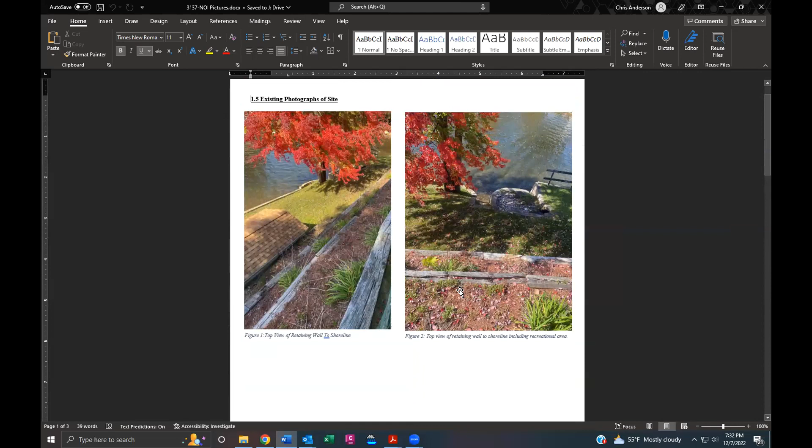Can everybody see my screen? Yep. Again, for the record, Chris Anderson with Hannigan Engineering, here to represent Paul Cadaret for the replacement of an existing timber wall located at 42 Pearl Street. This property currently contains an existing house, driveway, the whole nine yards, with an old timber retaining wall system facing towards Lake Shirley. This retaining wall holds back approximately 20 feet of land up towards the house. At this point in time, the retaining wall is in a state of deterioration and coming towards the end of its useful life. So it's the intent of the applicant to replace that retaining wall system in place with a masonry block wall system to ensure its long-term longevity. I do have a few pictures showing the current state of the retaining wall, taken from the top of the wall looking down. You can see the old timbers starting to decay away a little bit. I also have some side shots and another top shot showing the retaining wall in its current state. So as you can see, it's pretty deteriorated and coming to the end of its life.

So, Chris, do I understand it correctly that this retaining wall is not lakeside? It's farther away from the lake?

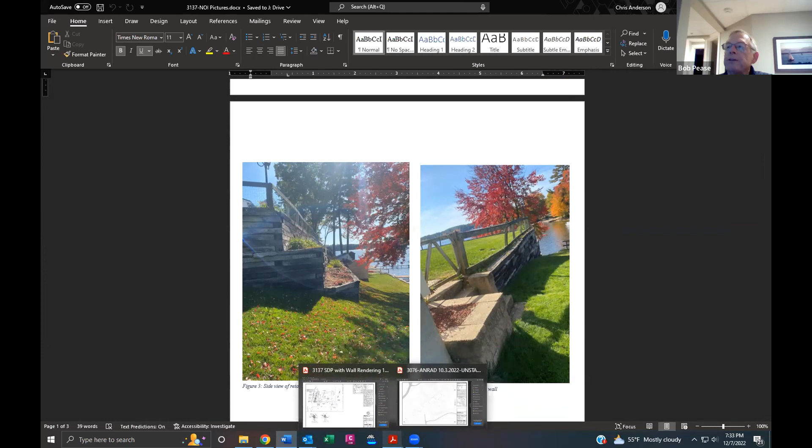It is lakeside and does face the lake, but this is all located outside of the actual lake itself.

The only retaining walls we're proposing to replace are located in this general area. There are three existing 4-foot tall timber walls, and the intent is to replace those in kind at the same elevation upon completion of construction. There would be a fall protection fence along the top edge to replace the existing guard post and rail fence that's there now. We'll encompass the entire area with straw wattle and silt fence along the lake shore line for sediment migration.

It was originally intended to utilize a portion of Lake Shirley during lake drawdown for access. We don't believe it's necessary at this point, but we'd like the commission's input on whether that would be acceptable. Access would be exclusively during the drawdown, and we would walk the line with the commission and the administrator prior to anything happening to make sure we're all in agreement.

Before the lake rose again, all structures and mitigation measures would be taken out of the lake to make sure that by the time the water was brought back up to the original intended elevation, it would be all set and done.

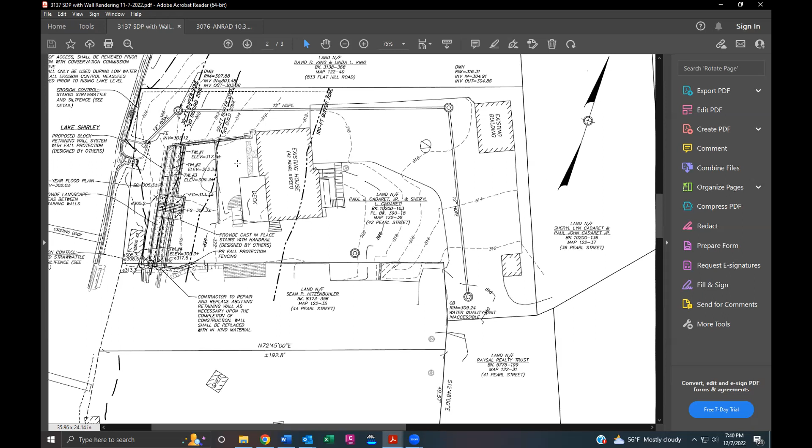This is an NOI. I'm hoping someone will make a motion to approve this NOI with the caveat that Richard mentioned about access through the property, and if they want to access it through the lake, they have to come back for a field change.

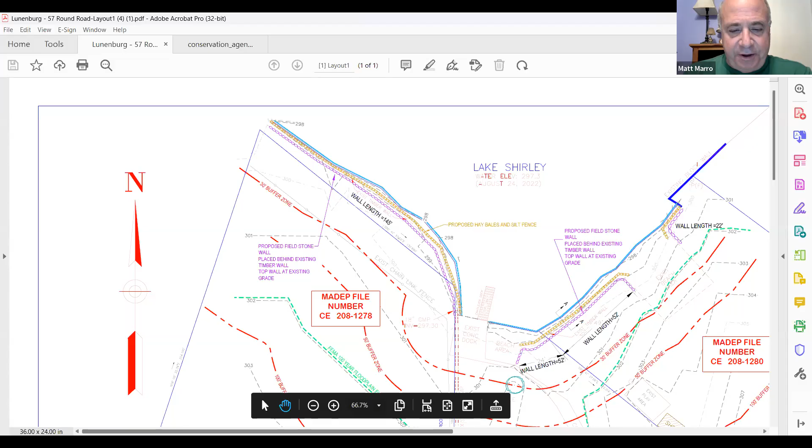I'm trying to get our new administrator a second screen and a license to Adobe Acrobat. Oh, that would be very useful. I have a license myself and it comes in very handy. Well, the town should be furnishing that to our administrator, in my humble opinion. Preaching to the choir on that one, Mr. Chair.

So just to review for the members, we have retaining walls that were historically present that are being replaced. I know the commission has walked the site and we went over some photos. At that point we were waiting for the DEP number and comments. Regarding the DEP comment on the floodplain, I went back to Mr. Oldfield and he was able to get a revised plan, which this is, sent to the office.

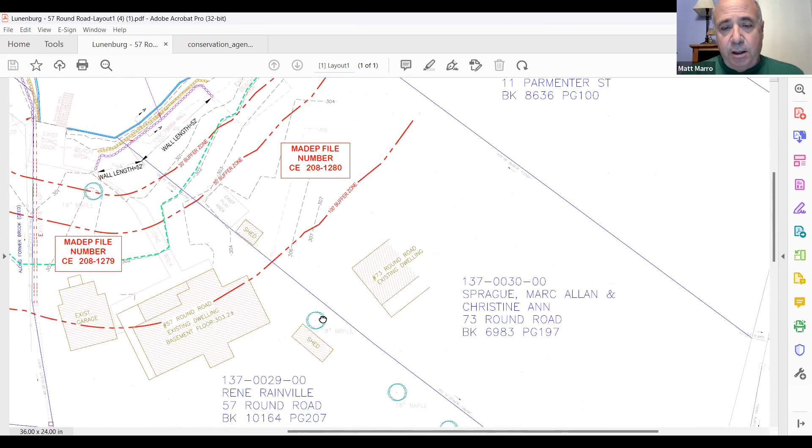I was able to email it to Rebecca last week, last Wednesday. So essentially, Mr. Oldfield has clarified these plans and included a revision note in here, which I don't know if you can see, but it's dated November 30th, and basically states that all the—let me shrink this down so I can get there better.

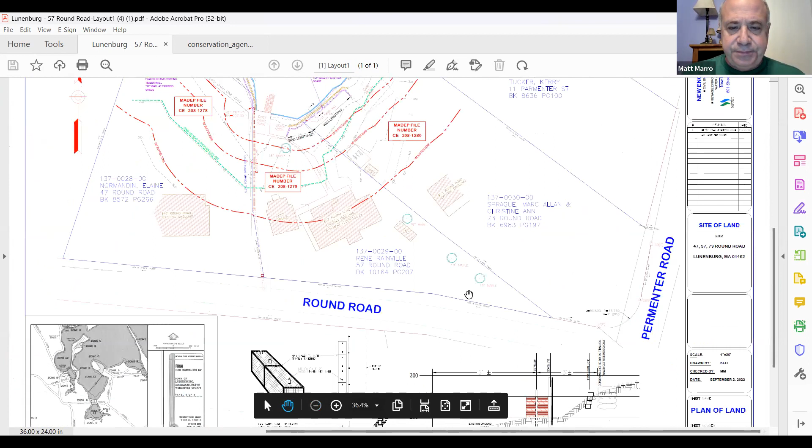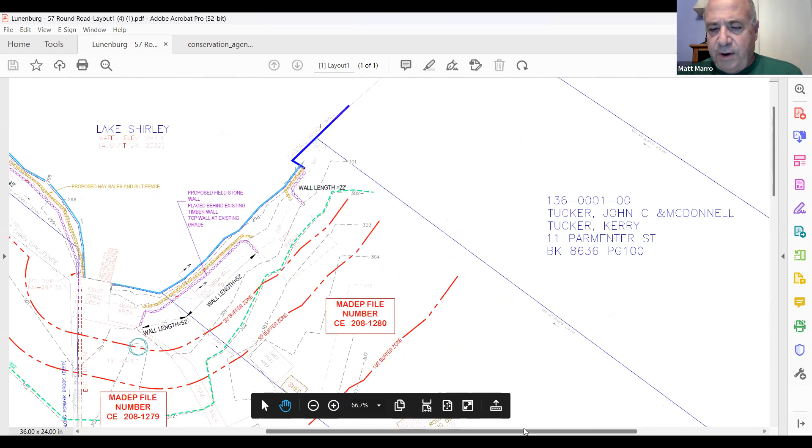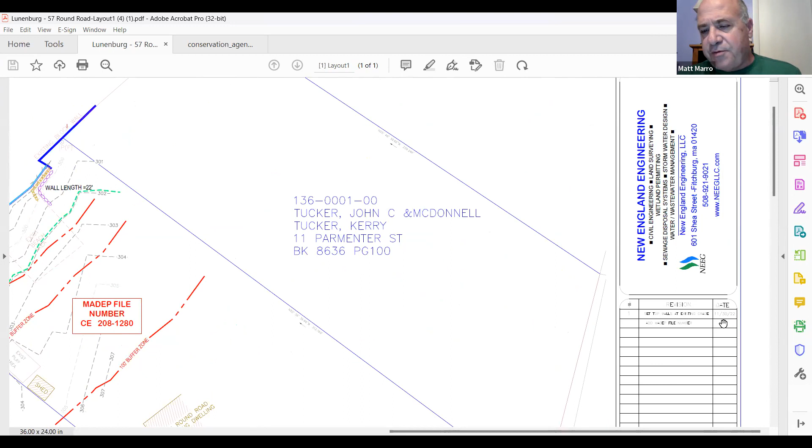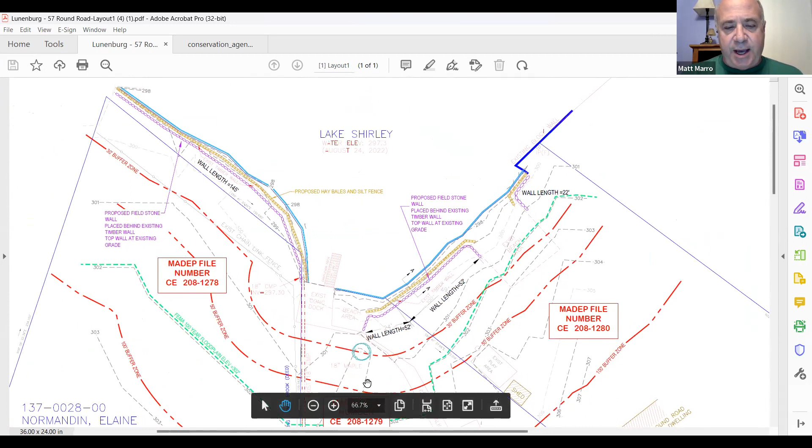It's hard to read with this PDF, the way he had to format it for color, but it says the top of the wall will be the existing elevation. It was noted that he revised it based on a DEP comment, and the revision date was November 30th.

So he made it clear on the plans that the wall is going to be the same height it was. The other DEP comment, from Judy Schmidt, asked about the timbers and how they would be removed. I sent her an email that day letting her know the timbers are basically dangling, and you don't even need an excavator to go in there and take them down. They can be pulled right out by a couple of guys with some muscle. And Brett Ramsden

routinely disposes of these. He knows how to dispose of them properly. She never replied to my email, and based on my experiences dealing with my own NOIs that I've filed, if they did have a further concern, I would have received a response immediately. So with that, I'll leave it to the commission.

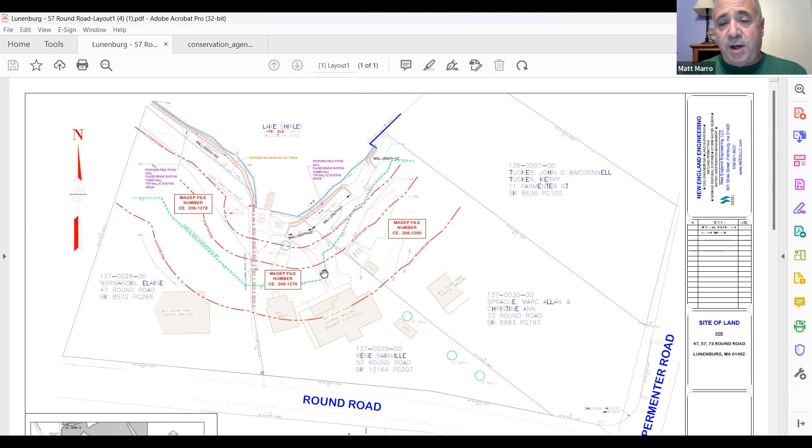Do we have any questions or comments from members of the commission on any of these three NOIs? We're going to vote on them separately. In my humble opinion—Jeff Viano.

Yeah, I just have a question. It seems like a portion of the existing walls are actually further away from the lake bed itself—like the water never reaches them. So are you planning on moving those retaining walls closer to the lake, or will they stay in their existing condition?

I guess, no—actually, if they go in, they'll go in a little bit more, like about six inches to a foot closer. The high water mark does reach most of the walls, with the exception of one part of Mrs. Normandin's wall, and that's not going to go any closer to the lake.

The way Brett does his walls, he digs in from behind the walls or where they were located, gets everything situated so he can install the new walls. So there won't be any filling of floodplain or lake body, no changes in elevation, no changes in length. The new structure would essentially replace the old one identically, with the caveat that it might go in a little bit. So they may lose a little land, but it's better than what they're going through right now because they've got some serious erosion issues there.

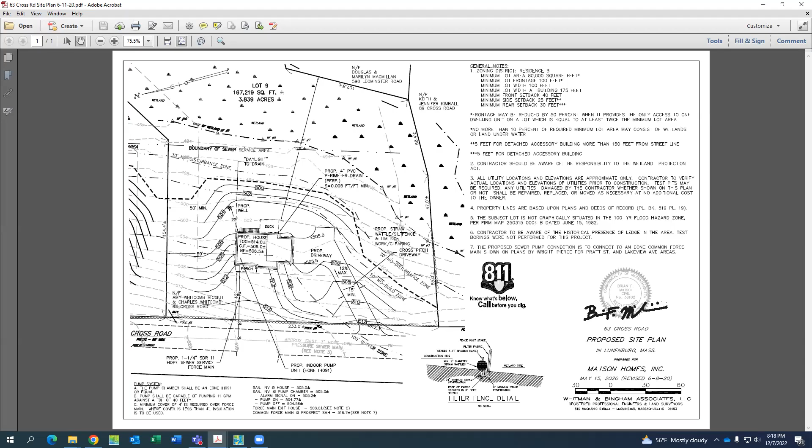Sorry, here we go. So very similar to the adjacent lot, everything was built in substantial compliance with the order, condition, and the approved plans. Very similar exceptions - also an AC unit in the back left corner of the house. Some paver walkways went in along the front of the house to get from the driveway to the front, and some in the back. Then the crushed stone drip edging went around the perimeter of the house as well. This one did not have a retaining wall proposed as an option, and that stayed consistent.

Wetlands, same thing along the back edge of the property. 30-foot buffer zone, no work occurred within that. Silt fence still in place along the edge. 50-foot buffer zone as well here, where the driveway and house were built outside of that zone. So very similar to the adjacent lot.

Any questions or comments from members of the commission? Hearing none, I'm looking for a motion to approve this certificate of compliance.

Actually, Mr. Chair, I did have one quick question - how big is the propane tank? Where the other one was outside the 100-foot, it really wasn't germane to the discussion, but this one's within the 100-foot. I don't know the exact size, it's a buried propane tank, so all we could locate was the cover. But typically I don't think these are much more than 50 to 100 gallons, that's my understanding. The only thing you can see above grade is just that access cover - your typical residential, smaller buried propane.

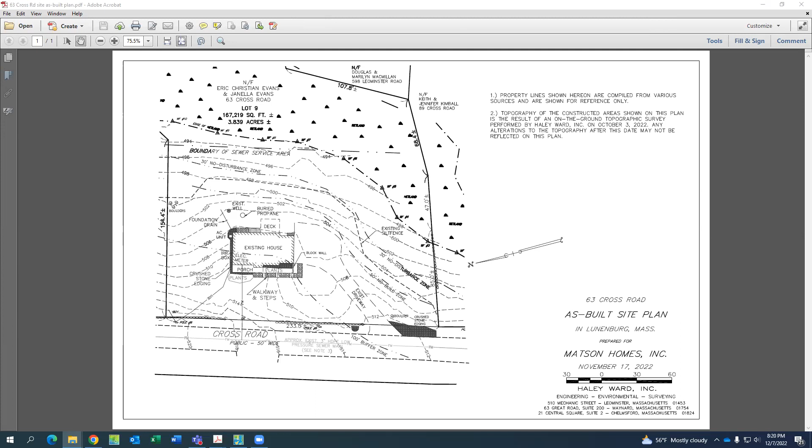Any other questions or comments from commissioners? I'm looking for a motion to approve. So moved, second by Mike. Motion is seconded. Roll call: Rich, aye. Aye. Mike, aye. Mary, aye. Richard, aye. And I for myself.

Thank you very much for your time, appreciate it. Thank you, Anthony. Nobody here left but us chickens.

Only members of the commission and associate commissioners left. Anna?

Have you had a chance to look at any of these enforcement actions yet? You're muted, Anna. You're still muted, I don't know why it keeps doing that. Anyway, so I tried to go through some of them.

One of them was definitely in contact with me a lot - it was for 48 Oak Ridge. She was in contact with me mostly regarding having an extension for the violation, just because it was a weird in-between time where I was just getting on and no one really responded to her email. But I looked into it and told her that before the 30th, I believe it was November 30th, she needed to submit at least an RDA just to show she was acknowledging the enforcement order, because she was not aware of what a restoration plan was or what to do in that situation.

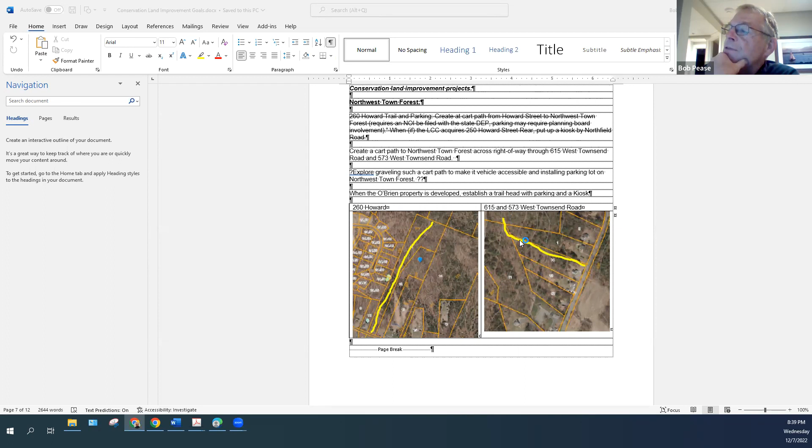And there's no good place to park. It's only our right of way. So we'd either have to create a parking area all the way in the back, with all the attendant problems of a remote parking area. We don't usually want a remote parking area, because it invites mischief. And that'd be a lot of work, to gravel all the way through there, although the land looks pretty dry.

Right, but if I may, Mr. Chairman, the purpose of doing the grant is to get us funded to have a lovely contractor do all that hard work. That's very true. And so...

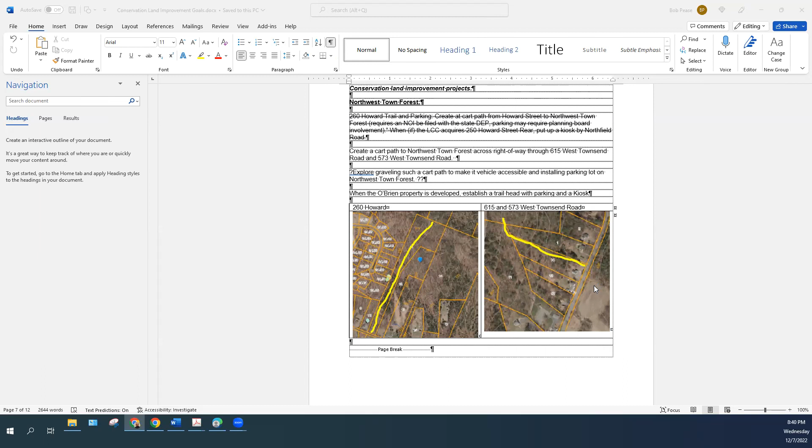It's my humble opinion, as just one person, that we should exercise some patience here, although the patience may be 5 more years, and try to establish some superior access through the O'Brien property, but that thing won't come to fruition for a long time yet, because I think it's highly possible that we'll be going back to court with Mr. O'Brien over the 40B. Well, yeah, it's certainly not obstacle free, the O'Brien path, but this might not be the highest priority thing to look at. I think you had some other ideas that I wasn't meaning to derail your conversation. I just wanted to be clear on your thoughts behind it.

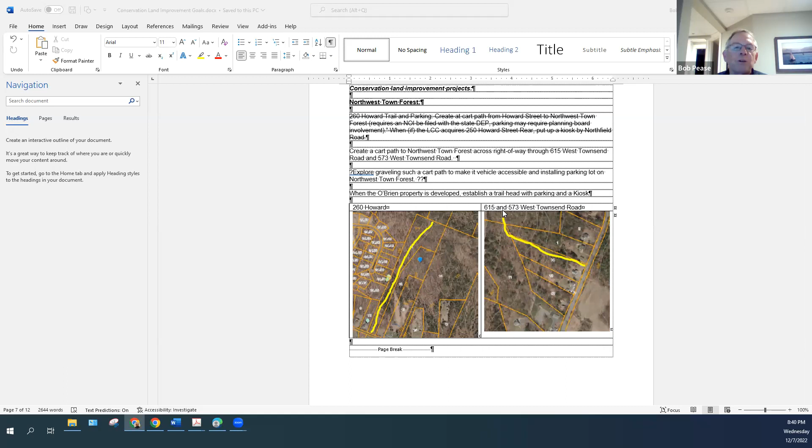Yeah, but Mary, if you have the ambition to establish, to hire somebody to do such a road, by all means, because I have ambitions, Mr. Chairman, but that might not be the best place to spend them.

Okay, Table Rock. To me, right now the access to Table Rock is up through Old Stagecoach Road. And the people that live here, again, put up a no trespassing sign, a private road, no public access. And the people who live here aren't that thrilled with people using this road either. And right now, when you go up there, Table Rock is right over here, way on the edge of the property, and there really isn't a good path to it. So I was thinking that we should either establish a better parking area across the street on...

...the Parks property, parkland, or we should try to- Matt Marro is supposedly gonna go out on Monday and delineate the wetlands. There's a wetlands that goes right along here in the front. And he's gonna delineate the wetlands to see if there's somewhere we could sneak a driveway in here and put a parking area just on the other side of the wetlands, so it's close enough to be seen from the road.

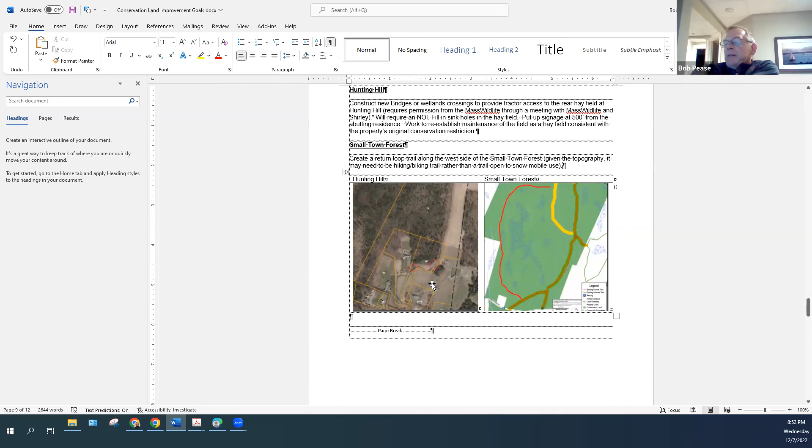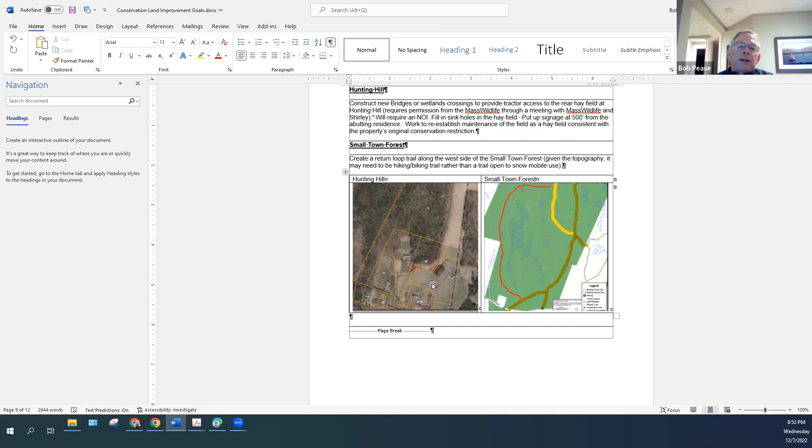Well, to me, the very first thing that has to happen is something I've been talking about but haven't acted on — to take a meeting with Shirley and Mass Wildlife to talk about haying that field. The director of Mass Wildlife, I forget her name, their office is down on the way to Shirley on the left-hand side, I think it's in Ayer, just past Bull Run.

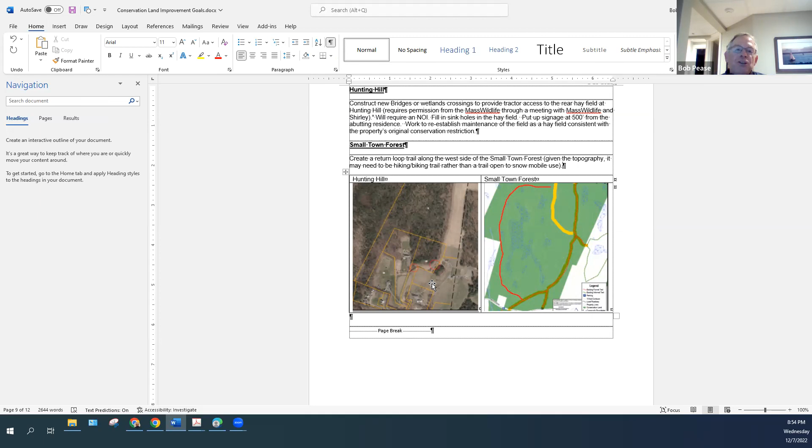And her attitude is that she's in charge and we have very little to say about it. In fact, I was going to take that up with town council about how much say Lunenburg actually has there — if I could get Shirley to go along with whatever we want, can we outvote her, or does she have the final say? Because she tends to have very definitive opinions, and very definitively, she's in charge and you're not. So it'd be nice to really be clear on the balance of power there.

Coincidentally, I have been reaching out through some points of contact to Shirley's Conservation Commission and have made contact — I forget the name, and I don't have my email in front of me — but they were asking if there were any kind of shared interest projects that were on our radar. And this seems like it fits that bill.

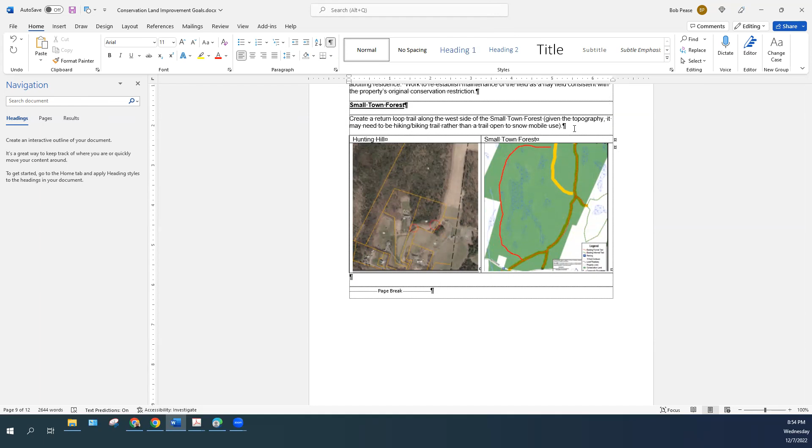Cowdrey area, this year.

One thing we could do is a planning grant again, where we apply for money to pay the engineer to redo the road back to Townsend, back to the Harley Wildlife Viewing Platform. If we're gonna do that, I think we should consider passing new rules to allow vehicles at the viewing platform during daylight hours.

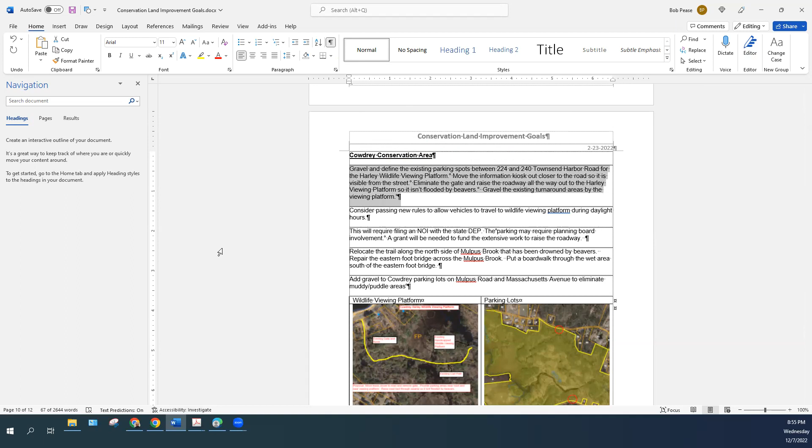Yeah, I think that makes sense if it's no parking after dark or whatnot. Because if it's gonna be for handicap use, we're not gonna tell them, well, you have to park up by Townsend Harbor Road and then walk 600 feet back to the wildlife viewing platform. At least I don't think we would. No.

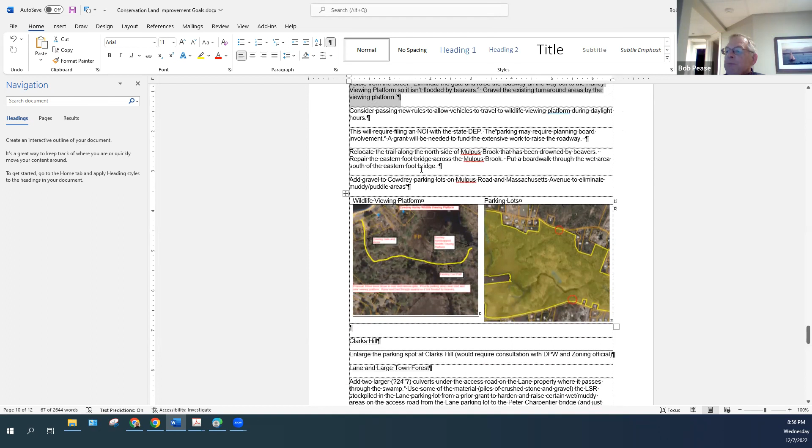And then there's some other trail work that needs to be done in Cowdrey, but that's not really grant material. Clark's Hill is nothing really. Lane and Large Town Forest, I didn't get to this when I was poking away at it, but we could look at redoing the culverts down there.

I put up signs in the last two months on all three, asking the public to try and make sure they stay clear, because if the public keeps them clear when they go by, we won't need to replace them. The problem comes when they get overgrown and it washes out the road. But if the culverts remain clear, I don't think we'll need to replace them.

And I did measure that area, and just for the purposes of sharing, it's about 400 feet through there.

And we could also do something at the beginning there - when the club put in the existing culverts right by the parking spot, they're not located in the right spot, so the water still continues to flow over the road at that low spot before you go up the first hill. There's a lot of ice there, water pools in the winter, and I've landed hard a couple of times down there.

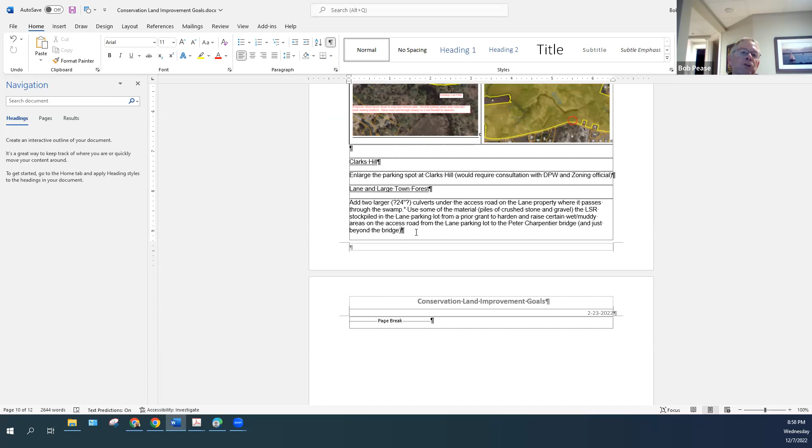Luckily I just bounced, like Tigger. So maybe we could look at redoing this sooner rather than later - an immediate grant to put in better culverts and raise the road bed so the water actually flows through the culverts and not over the road. I think that's easy, kind of low hanging fruit. I'm glad you think so.

I'm not sure if we need a trails kiosk - there's an existing one, Mary showed me a picture. Mike, do you know if there's a kiosk up there in the appropriate place for a trails kiosk? There is, on Hollis Road, right by the parking area, though it's kind of set in a ways. It looks like it could be updated. There's a sign calling for pollinator habitat, and sometimes it gets a little overgrown, but we've tried to trim some of the grasses around it.

I'm proposing a trails map that shows the loop trail that's gonna be left there after the logging operation is done, and marking it with 'You Are Here' map signs, plus a kiosk with the land use rules and a trail map sign on it, similar to our other conservation properties.

Do we have room for that, or is it all pollinator habitat stuff? I think there's certainly room, because I noticed there is that loop trail. In fact I took it - it's a little bit overgrown, but I've seen people actually go on it. But I didn't take it all the way, so I don't know where it goes.

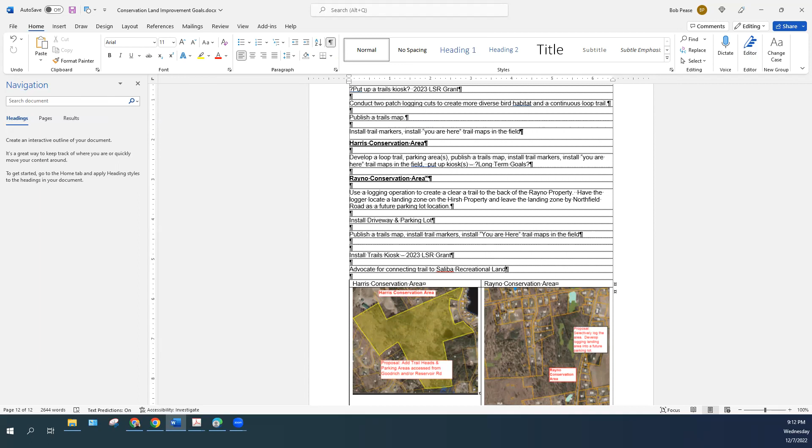Hey Bob, yes, hey, I did happen to just send out a copy of that order of conditions for the Cove Road from 1995 with my signature on it. Oh, you mean the one where he said there was no prior wetlands delineation and all that other nonsense? Yep. So there clearly was, because there was clearly a filing and a notice of intent for it. Yeah, well, he made all, I don't see a lot of future.